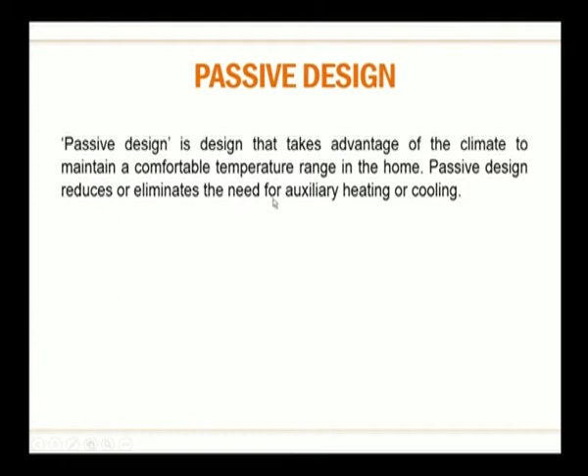Passive design is a design that takes advantage of the climate to maintain a comfortable temperature range in the home. Passive design reduces or eliminates the need for auxiliary heating or cooling.

Before starting any design, we must understand the climate in which the project is going to take place and how it will contribute to the built environment, because humans can adapt and be comfortable only within a certain temperature range depending on their location and cultural experiences. To maintain thermal comfort, we must be aware of the local climate and take advantage of its different aspects to reduce external heating or cooling, which in turn benefits us by reducing our energy bills.

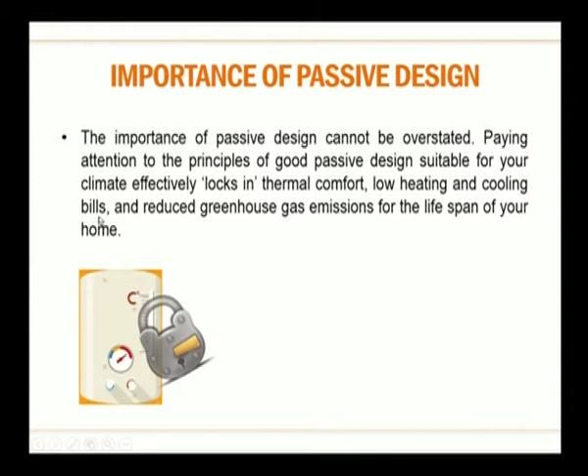Importance of passive design: the importance of passive design cannot be overstated. Paying attention to the principles of good passive design suitable for your climate effectively locks in thermal comfort, low heating or cooling bills, and reduced greenhouse gas emissions for the lifespan of your home.

When you consider the principles of good passive design according to your climate and traditional homes in the locality, it helps ensure thermal comfort within the built environment can be locked in and used without external devices, which benefits us by reducing energy bills and also by helping fight climate change.

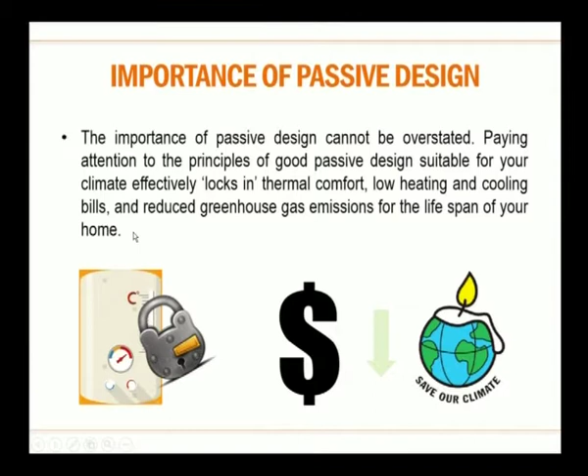Passive design utilizes natural sources of heating and cooling such as the sun and cooling breezes. It is achieved by appropriately orienting your building on its site and carefully designing the building envelope—roof, walls, windows and floor of a home. A well-designed building envelope minimizes unwanted heat gain or loss.

When you start a design, you must know about the local climate, temperature bands, how many people are going to use the space, and what type of radiation different devices in the space will create. With this theoretical information in hand, we can place each detail correctly, which will reduce heat loss or heat gain.

For example, if you are in a region which experiences longer winters, you want to trap natural solar radiation inside, so you must orient your buildings facing south and west, which will benefit from the solar radiation falling on them.

On the contrary, if you are in a region with a tropical climate, you want your building's longer facades facing north and south, which will reduce incoming solar radiation, and the shorter dimensions should face east and west.

This type of building orientation, along with the location and use of windows, roofs, wall types, and wall thickness, should all be understood through the study of passive design. This is how a building is oriented to reduce heat gain or heat loss.

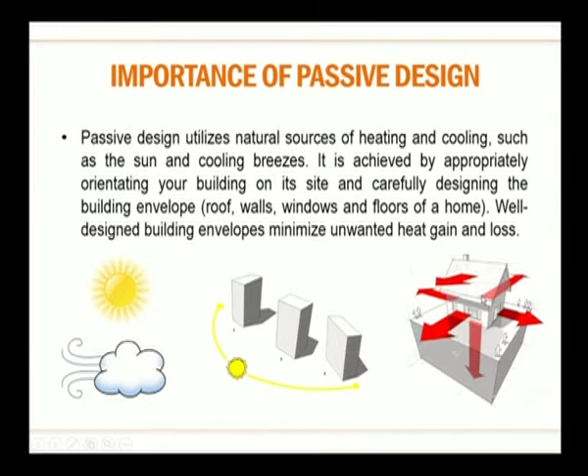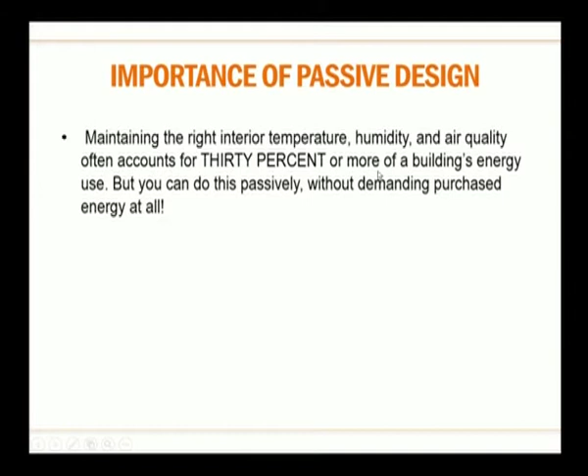Importance of passive design: maintaining the right interior temperature, humidity, and air quality often accounts for 30% or more of a building's energy use, but this can be done passively without demanding purchased energy at all. To maintain a certain temperature, we typically use air conditioning or room heaters, which accounts for almost 30% of energy use within the building.

When you rightly orient your buildings and make use of all the passive design principles covered in this subject, we can reduce the usage of external heating or cooling, or completely ignore it.

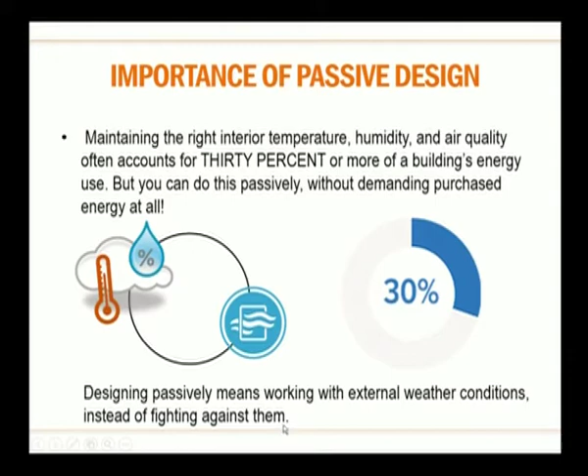Designing passively means working with external weather conditions instead of fighting against them. This is not about finding flaws in your climate, but taking advantage of the climate wherever you are located. So how do we achieve it?

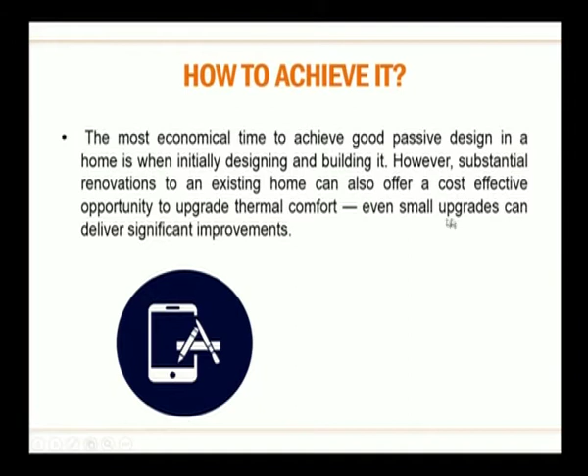The most economical time to achieve good passive design in a home is when initially designing and building it. However, substantial renovation to an existing home also offers cost-effective opportunities to upgrade thermal comfort, and even small upgrades can deliver significant improvements.

It's better to make your building completely passive from the schematic design stage itself, but for old buildings already built without passive design in mind, refurbishment can also improve air quality, thermal comfort, and humidity levels within the built environment.

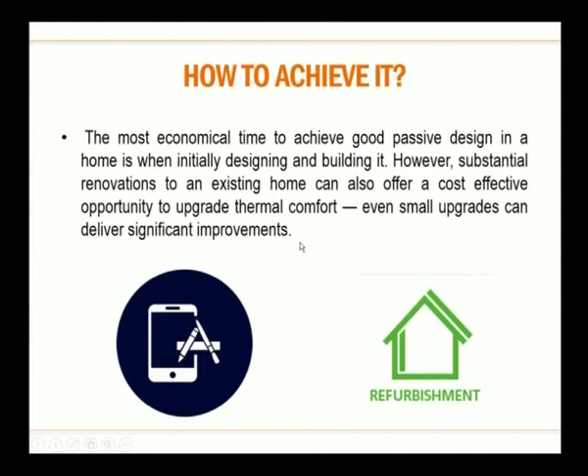Even a small change in your decisions and principles can affect the built environment extensively and reduce your energy demands. For example, if there's a house built 30-40 years back and you want to refurbish it to reduce energy bills, say it's located in a cooler area, there will be cold air coming through construction gaps in the window frame and wall, or door frame and wall. This air leakage lets in cold air, increasing the efficiency load of the room heater and your energy bill. To reduce that, you can seal the air leakage. This is one example of refurbishment.

For best results, passive homes need active users, people with a basic understanding of how the home works with the daily and seasonal climate, such as when to open or close windows, and how to operate and adjust shading. Even though architects are smart enough to create sustainable, efficient and intelligent buildings, end users must be the ones using the space. There's no point creating these principles in a space that isn't used properly. It needs active users, and you must educate your clients on when to open and close windows, and how efficiently a window can be used.

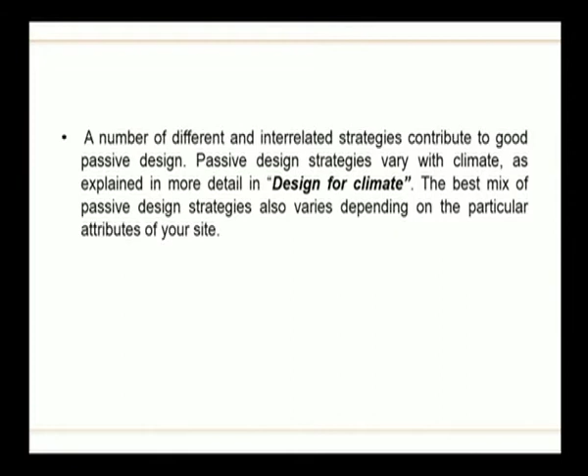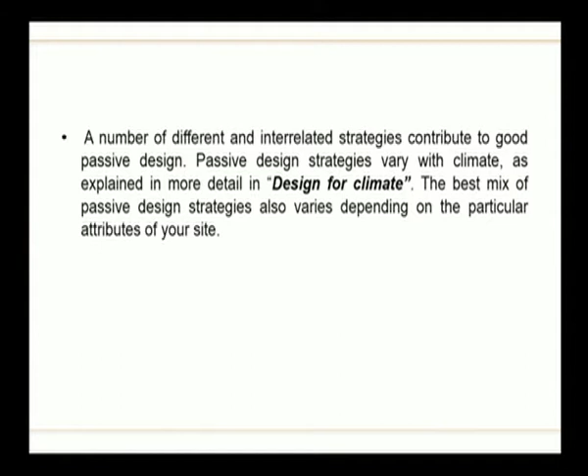A number of different and interrelated strategies contribute to good passive design. Passive design strategies vary with climate, as explained in more detail in Design for Climate. The best mix of passive design strategy also varies depending on particular attributes of your site. We will follow some points explained under the topic Design for Climate, covering the principles of passive design.

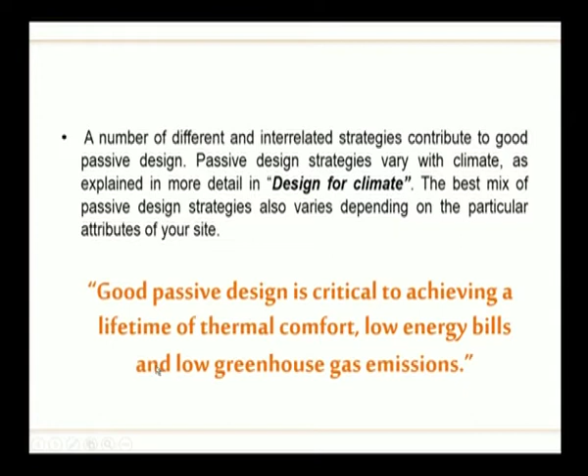Good passive design is critical to achieving a lifetime of thermal comfort, low energy bills, and low greenhouse gas emissions. So it's not only going to benefit you individually, but it's also going to impact the environment and biodiversity conditions. It helps them grow without reducing their effects.

Design for Climate: good passive design ensures that occupants remain thermally comfortable with minimum auxiliary heating and cooling in the climate where they are built.

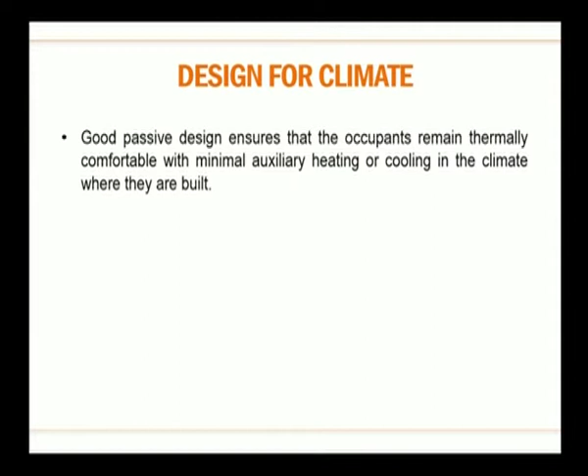Each of the 6 main climate zones in India has its own climatic characteristics that determine the most appropriate design objectives and responses. When designing a building with passive design principles, it cannot be replicated from one location to another with a completely different region and climatic conditions. Each design using these principles will be very unique and adaptable, usable only for that particular site, because it uses the surrounding benefits, climate, weather, and microclimate aspects of the site.

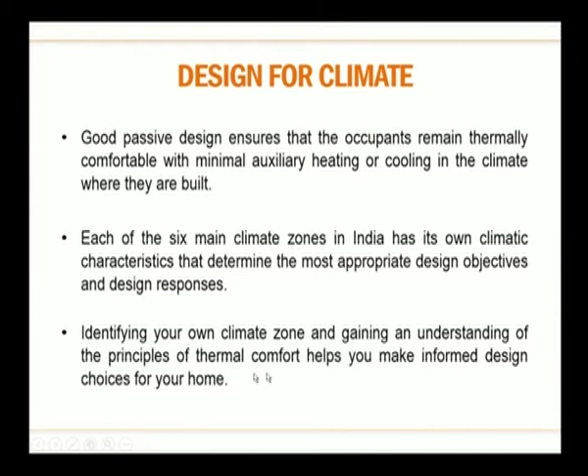Identifying your own climate zone and gaining an understanding of the principles of thermal comfort helps you make informed design choices for your home. India has been divided into 6 main climatic zones, each with different passive design principles. Wherever you are designing, you need to understand that particular climate and what type of design principle should be used, which can even be modified according to certain site conditions, and which will be beneficial on a large scale.

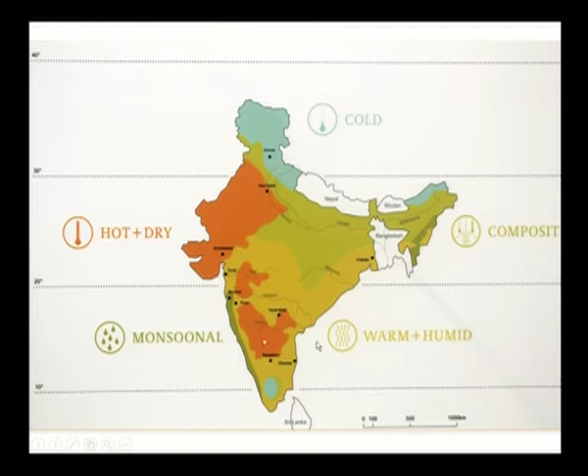These are the different climatic zones. The top, as you see, is cold, and the middle strip is mostly composite. Areas such as Rajasthan and Gujarat experience usually hot and dry climate, this light green is monsoonal climate, and down south is usually warm and humid because we fall in between the band of tropics.

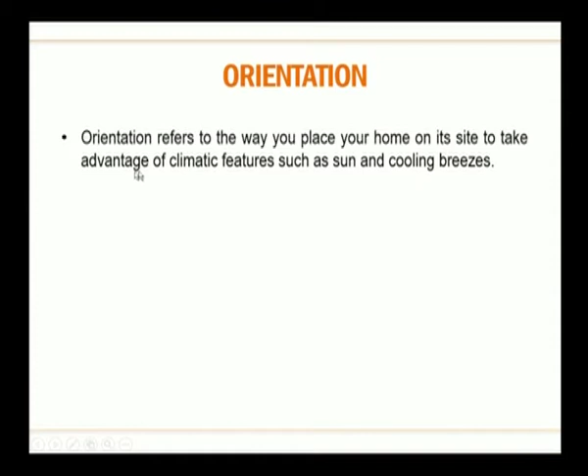Orientation refers to the way you place your home on its site to take advantage of climatic features such as sun and cooling breeze. For example, in all but tropical climates, the living area would ideally face north, or as close to north as possible, allowing maximum exposure to the sun and easy shading of walls and windows in summer.

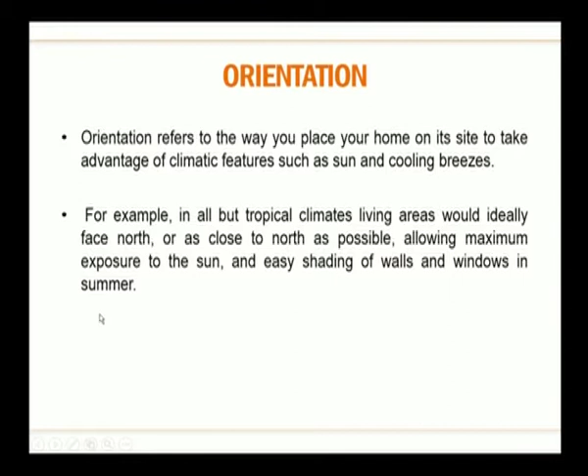Orientation becomes a basic aspect of passive design, in which you need to place your building according to your specific climatic zone to get benefit from the climate. If you are in a colder region, your building's longer facade must face towards the west or south, and when you are in a tropical climate, the longer facade must face towards north. This reduces the solar radiation coming inside the building, which eventually reduces air conditioning usage.

Good orientation reduces the need for auxiliary heating and cooling and improves solar access for photovoltaic panels and hot water systems. Your home is thus more comfortable to live in and cheaper to run. When orienting your building properly, you also need to consider how PV cells trap solar radiation for electricity, or for solar hot water systems—you have to orient these according to the sun path diagram of your location for more benefit.

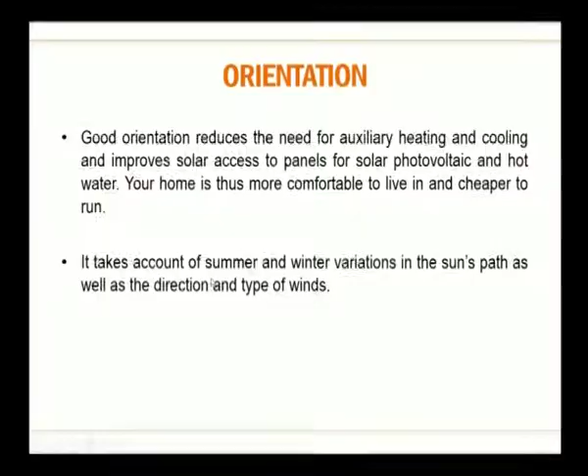For example, if you are in a tropical region, your solar system or photovoltaic cell must face towards the west, because solar radiation is very harsh when the sun is setting. So there will be a lot of heat and light trapped inside the cells, which will in turn be used as renewable energy to create electricity.

Orientation takes account of summer and winter variation in the sun path as well as the direction and types of wind. So orientation is not just about radiation, it's also about wind patterns. When making design decisions, you should refer to windrose patterns, which inform you of the prevailing wind directions and towards which you should or should not orient your building. In a colder region, you would not appreciate a cold gust of wind, but in a tropical region, wind breeze is much appreciated or expected.

You have to orient according to the prevailing wind direction, informed by the windrose pattern of your location, and how the sun path moves on different dates. June 21st is the summer solstice, the longer day, and December 21st is the winter solstice, the shorter day—the sun path is completely different. You must make design decisions according to your climate: in a colder climate, ensure your colder months benefit most from passive solar design; in a hotter climate, orient your building to benefit from mutual shading so it's not exposed to or inviting excess solar radiation.

This is an example of a windrose pattern. For this building, as you can see, this side has more prevailing winds. Even though there is wind from all directions, the most common wind direction is towards the east and northeast. So the windows are oriented according to this direction to invite the cool breeze inside.

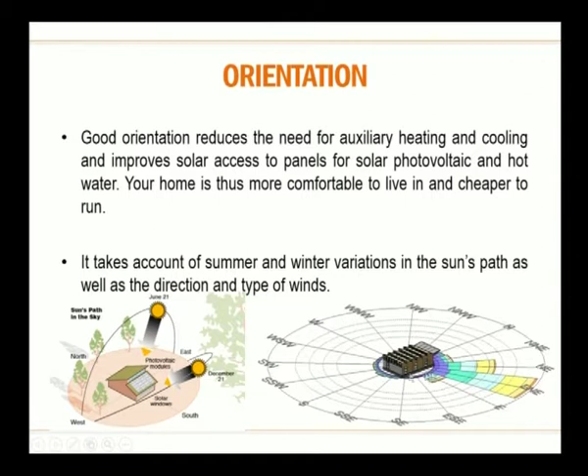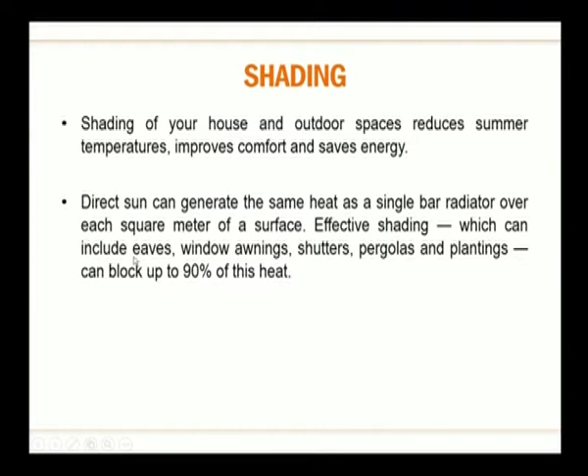Shading of your house and outdoor space reduces summer temperature, improves comfort, and saves energy. Direct sun can generate the same heat as a single bar radiator over each square meter of surface. Effective shading, which can include eaves, awnings, shutters, pergolas and planting, can block up to 90% of the heat.

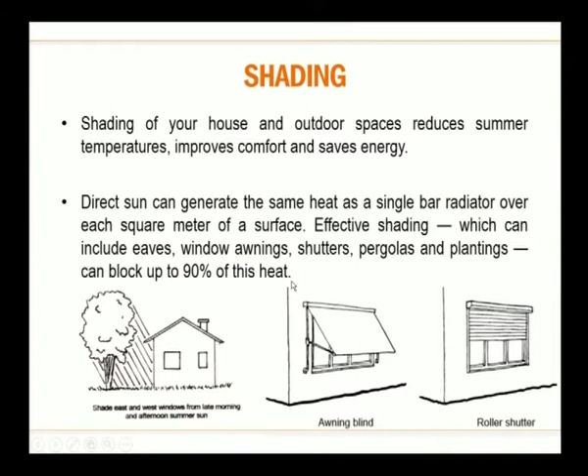In a harsher climate with a lot of solar radiation, it's ideal to have large windows to invite wind, but large windows also invite harsh solar radiation. So you must eliminate direct solar radiation by using different types of shading systems according to your climate, and you can benefit from the prevailing wind directions specific to your location.

Shading of glass to reduce unwanted heat gain is critical, as unprotected glass is often the greatest source of heat gain in a house. However, poorly designed fixed shading can block winter sun. So again, seasonal and climatic variation has to be considered from schematic design development. Making anything fixed or non-operable is actually bad design, because it lets in sun but gives you no ventilation—it's just glass inviting sun inside. You must create adaptive opportunities for the user to change their environment according to changing needs and climatic conditions.

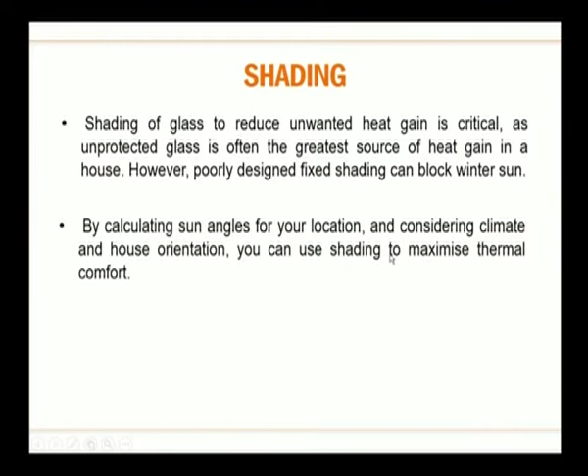By calculating sun angles for your location and considering climate and house orientation, you can use shading to maximize thermal comfort. If located in a harsh sun climate, the sun path must first be analyzed properly to understand from which direction the sun is coming and how it can be blocked.

Without knowing the sun path diagram, whatever shading design you are doing might be over-engineered or under-engineered, because you will not know exactly where to stop your shading. You might be providing 10 meters of shading, whereas it just needs 5 or 5.8 meters. So understanding the sun path diagram is a very important aspect of shading and shading design.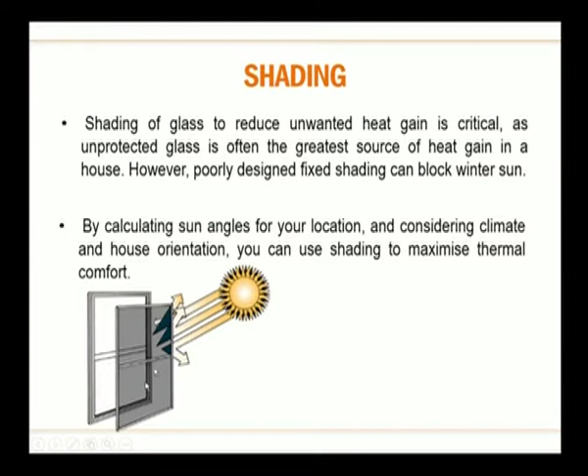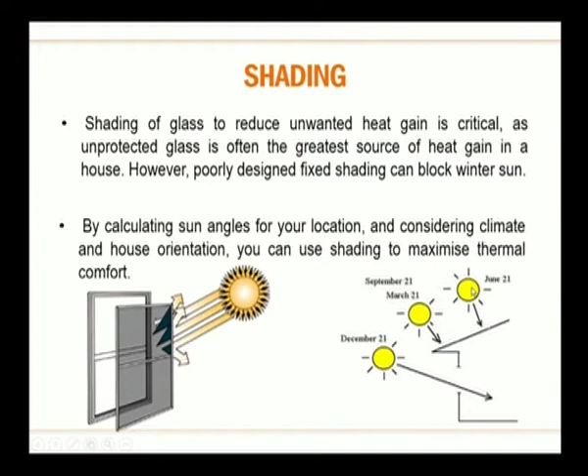This is an example of tinted glass treated with a coating which reduces and reflects radiation, and this shows different sun locations according to different dates. As you see, the December winter sun is usually low lying, and as we go from March to June the sun level increases, and during June or the summer months it is usually very high, with a lot of solar radiation.

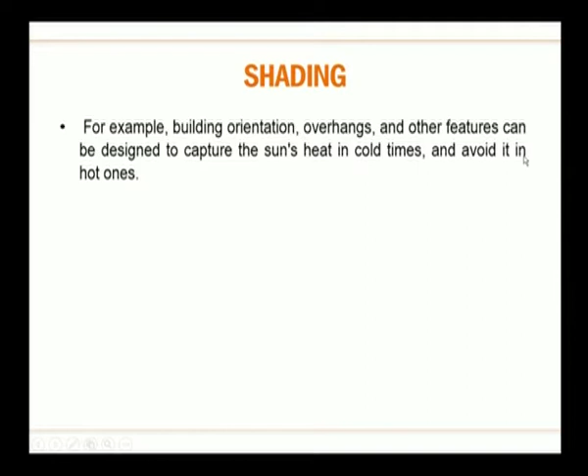Building orientation, overhangs and other features can be designed to capture the sun's heat in cold times and avoid it in hot ones. So it is not just for one climate; you can change your design according to seasonal variations. For example, in locations like Greece or Spain, summer temperatures go up to 40 degrees Celsius, while winter temperatures can go down to minus 3-4 degrees Celsius. So they need different strategies that work better during winter months to gain passive solar heating, and during summer months to neglect solar radiation completely.

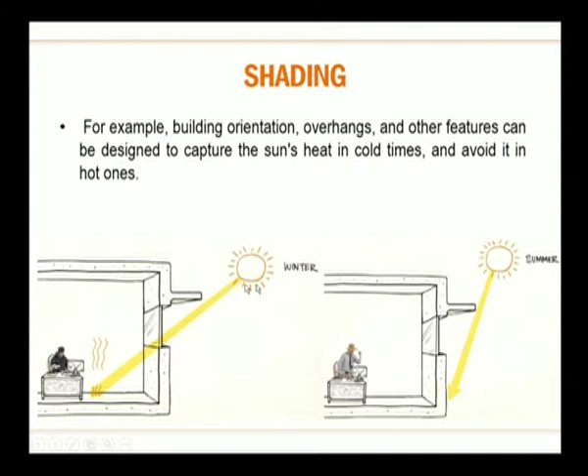As you see, this is the winter aspect and the summer aspect. In this picture, the sun's location is different in the two images because one is a winter month, so the sun path is very low, and the other is a summer month, when the sun path is higher. So the sunshade is designed accordingly - it will block only the summer radiation and let in the winter radiation.

Moving on to passive cooling. Passive cooling is the least expensive way to cool your home. To be effective, passive cooling techniques need to cool both the house and the people in it. With elements such as air movement, evaporative cooling and thermal mass, passive cooling design techniques can be applied in new homes as well as renovations across a range of different climatic zones.

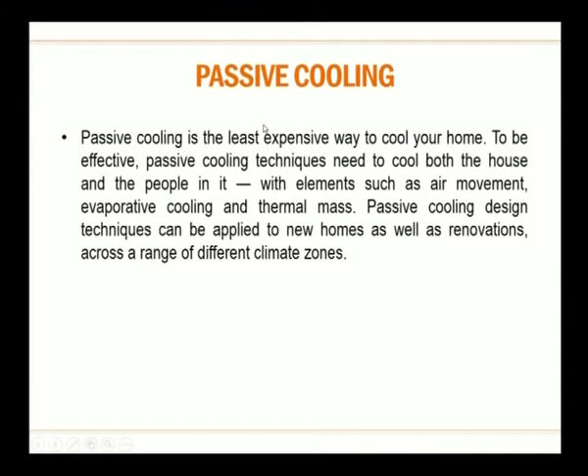Passive cooling is similar to passive heating, but it focuses just on cooling effects, which can be adopted in climatic zones such as tropical, warm and humid, and hot and dry climates. These techniques can be used to reduce air conditioning bills by taking advantage of ventilation and wind rose patterns and prevailing wind directions, as well as eliminating solar radiation by knowing the sun path diagram.

These are different types of passive cooling techniques which will be dealt with later. The sun heats buildings, especially dark roofs and pavements. So when adapting passive cooling for a building in a tropical region, or wherever the sun is very high, the incident solar radiation falling on a horizontal surface such as a roof is very high. You need to ensure the roof material is not dark colored, and it is more encouraged to use reflective surfaces to reflect back the incident solar radiation. You can minimize unwanted heat gain by choosing more reflective surfaces or vegetation.

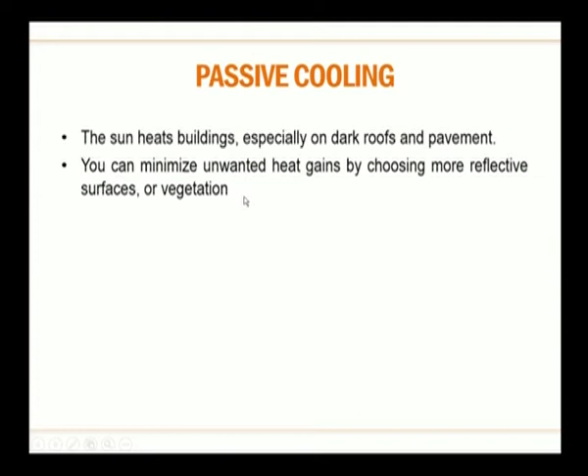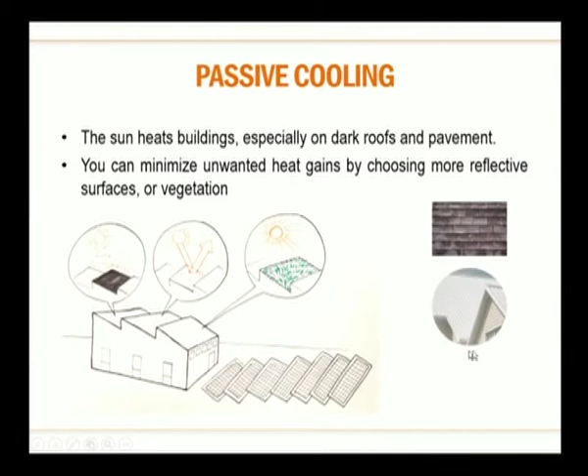As you see in this picture, this is for passive cooling. Different surfaces, as we know, a horizontal surface is going to absorb a lot of solar radiation. So you have to avoid dark roofs like this, and use more reflective roofs or vegetation instead.

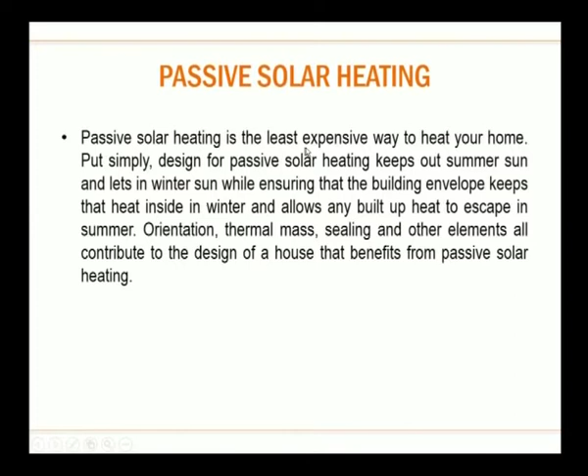Passive solar heating is the least expensive way to heat your home. Put simply, passive solar heating design keeps out the summer sun and lets in the winter sun, while ensuring that the building envelope keeps the heat inside in winter and allows any built-up heat to escape in summer. Orientation, thermal mass, sealing and other elements all contribute to the design of a house that benefits from passive solar heating. As we saw with passive cooling, this is how to heat your home when building in a much colder region or one with prolonged winter months.

So if you are in a composite climate, say a place where even the winters are very harsh and even the summers are very harsh, a passive design must ensure letting in the winter sun, while also making sure that the external heat built up during summer has proper provisions to escape.

As you see, the shading and window location is designed according to the winter sun, so the winter sun can get in, but the eaves are projected out in such a way that they block the summer sun for control. You have to provide controls on this window and it should not be made as a completely fixed glass, because when summer heat builds up within the space, you need some ventilation or opening for the heat to release or escape outside.

Only then you will feel equivalent to outdoor temperature, or else your home might have a very different temperature between the outer and the inside. Different materials like thermal mass and distribution patterns of internal gain and absorbers can be used, which will be discussed in detail in the next unit.

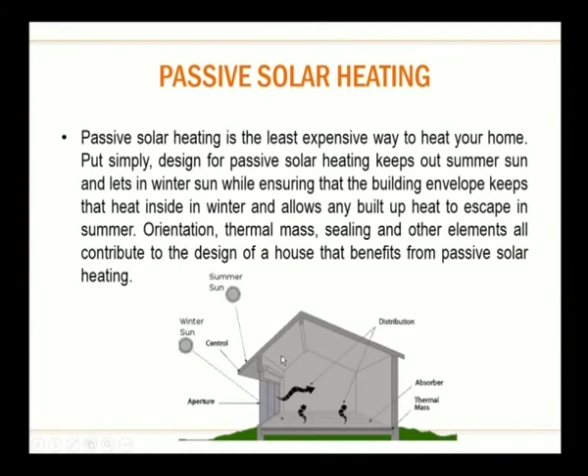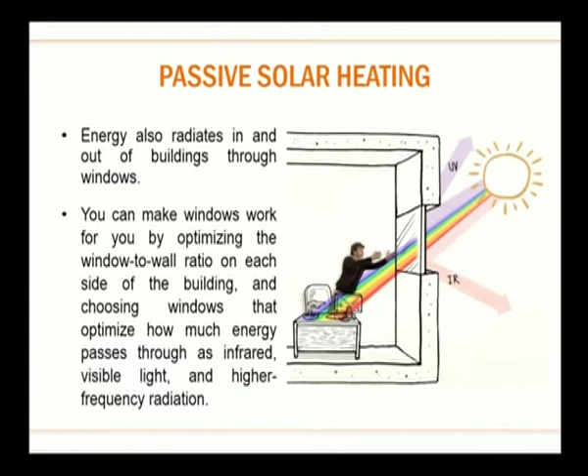Energy also radiates in and out of a building through windows. So you can make windows work for you by optimizing the window to wall ratio on each side of the building and choosing windows that optimize how much energy passes through as infrared, visible light and higher frequency radiation. So when you are designing windows, you should consider wall to window ratio. Say for example, if you are designing for passive solar heating,

having a lot of window is very good if it is letting in good solar radiation, but as a disadvantage, it can also have a lot of air leakage, with cool air from the outside penetrating through the air gaps and coming inside. So we have to come up with an optimum balance to maintain the thermal comfort within the built environment, to invite the solar radiation from outside, but to reduce the heat loss and improve energy efficiency.

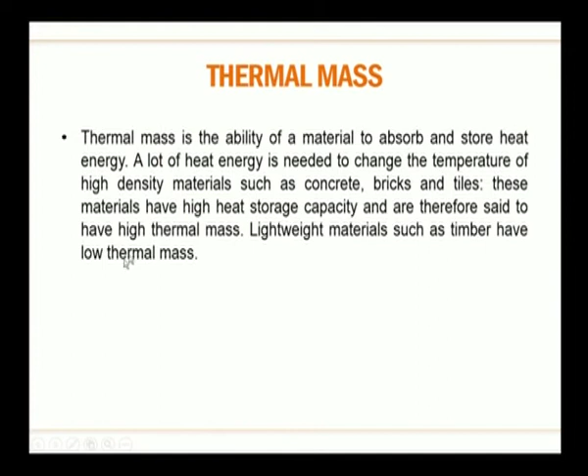Thermal mass. Thermal mass is the ability of a material to absorb and store heat energy. A lot of heat energy is needed to change the temperature of high density materials such as concrete, bricks and tiles. These materials have high heat storage capacity and are therefore said to have high thermal mass. Lightweight materials such as timber have low thermal mass. So this is why, when you are looking at buildings for colder climates, thermal mass becomes very crucial, because thermal mass materials have high heat storage capacity.

So what is heat storage capacity? When heat is being produced within a space, the capacity of the material must be high to trap, absorb and protect this heat within, and it should not be light or low heat capacity. If it is a low heat capacity material, then whatever heat is coming and falling on the material will automatically get transferred to the outside.

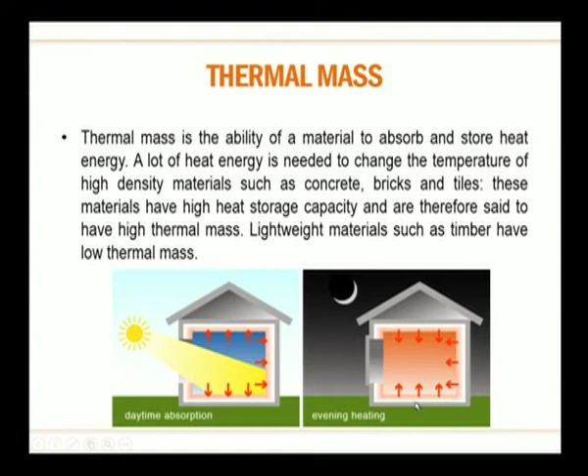So as you see how thermal mass works in this picture, in the daytime when the winter sun is low, it falls on different surfaces, and all the surfaces are made of thermal mass. This thermal mass makes sure this incident solar radiation will be absorbed on all these different surfaces. During the evening or night time, when you are using heating, you are going to close your window completely. So whatever heat was absorbed during the daytime will be emitted out, and it will make sure the built environment is kept at a comfortable temperature, and it reduces the usage of room heaters.

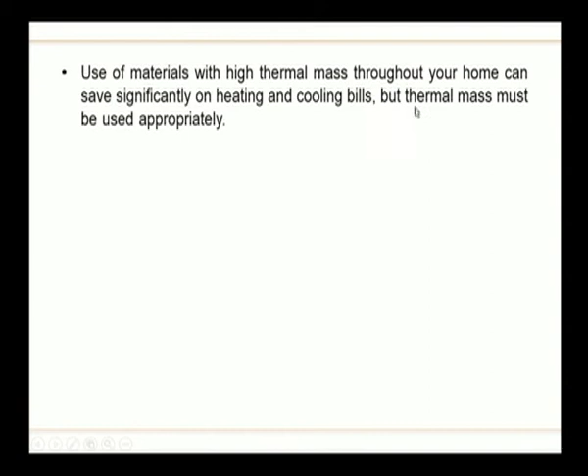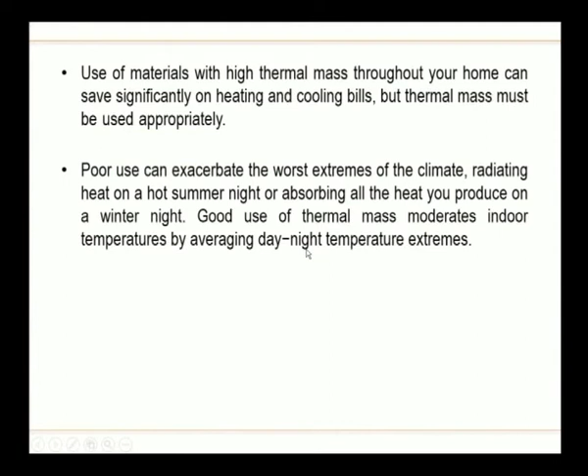Use of materials with high thermal mass throughout your home can save significantly on heating and cooling bills, but thermal mass must be used appropriately. Poor use can exacerbate the worst extremes of climate, radiating heat on a hot summer night and absorbing all the heat you produce on a winter night. Good use of thermal mass moderates indoor temperature by averaging day-night temperature extremes. So choosing what type of thermal mass and heat storage capacity is very crucial, and it depends on location to location.

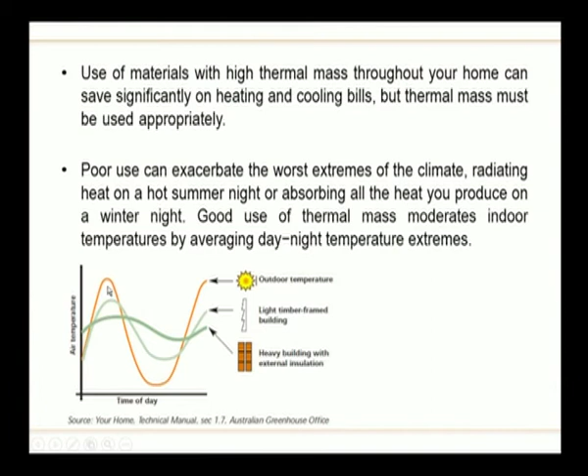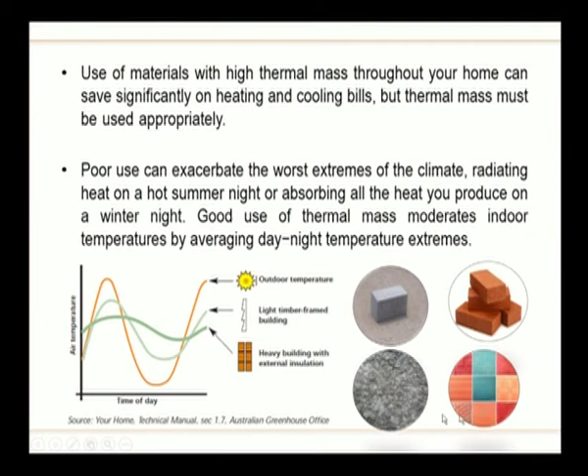So as you see in this picture, this graph shows the yellow is the outdoor temperature, which is very high. When you are using a light timber framed building, the indoor temperature is shown by light green. But when you are using a heavy building with external insulation, which will be good thermal mass, this is how the temperature will follow. So as we can observe, the peak of temperature is reduced, and even the colder temperatures are maintained, because the heat that is trapped during the day will get emitted during the night. And these are different examples of thermal mass.

Glazing. Glazed windows and doors bring in light and fresh air and offer views that connect interior spaces with the outdoors. However, they can be a major source of unwanted heat gain in summer and heat loss in winter.

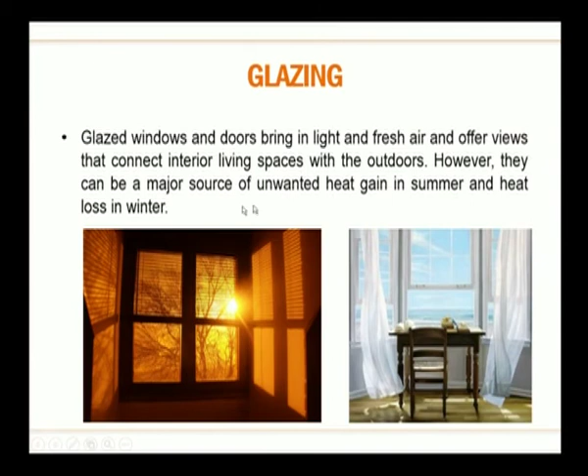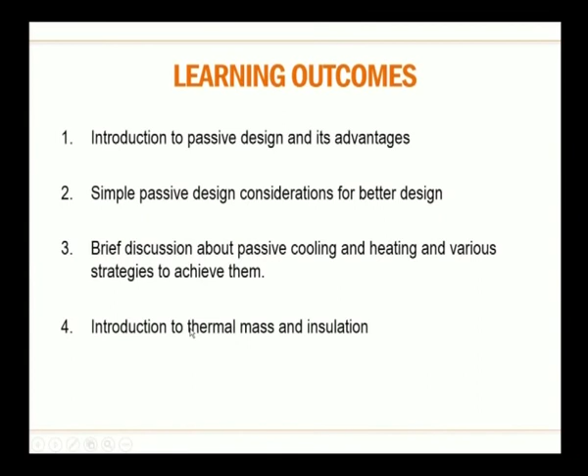So next, learning outcomes. Let's see what we have learned in this whole video. First we started with an introduction to passive design, its importance and its advantages, and then we moved on to simple passive design considerations for a better design, then a brief discussion about passive cooling and heating and various strategies and how to achieve them, and then we studied thermal mass and insulation and its importance.

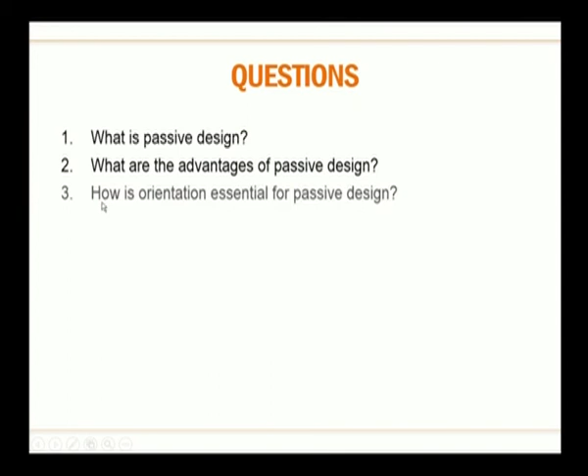Questions: What is passive design? What are the advantages of passive design? How is orientation essential for passive design? Explain in detail about passive heating and cooling. How can thermal mass make your home better? What is insulation? State some of its uses and climatic applications.